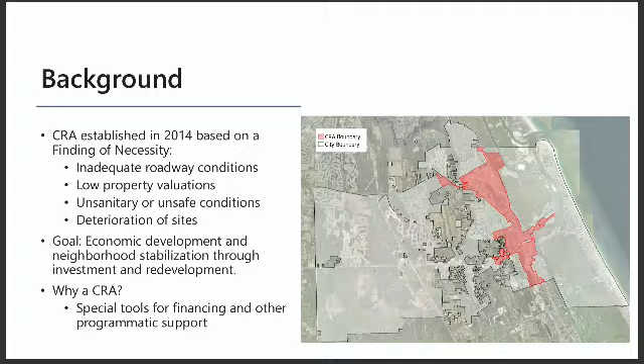This is not the first time that New Smyrna Beach has had a CRA. There was actually a prior CRA prior to 2014, but a new CRA boundary was established in 2014. So we are about 10 years out from that, looking to update that plan.

So why update? One thing, we want to review progress and successes that have happened over that 10-year period. Conditions change, so we want to make sure that we're dealing with the conditions that are still relevant in 2025, not just conditions that were relevant in 2014. There were also some very specific conditions within this CRA that had to do with which areas the CRA could invest in that changed after that 10-year mark was passed, so we're able to address those more fully now.

And then finally, there's the opportunity to hear from new people. So there are people who either weren't aware and didn't participate in the earlier plan, or maybe didn't live here and have become part of that new investment in the CRA area.

So let's move into some of the strategies that are already in the CRA plan. And when we talk about an update, it really is an update. It's not a whole new plan. We're validating that some of those strategies are still necessary, and then identifying gaps for where there's a need to revise or enhance those strategies.

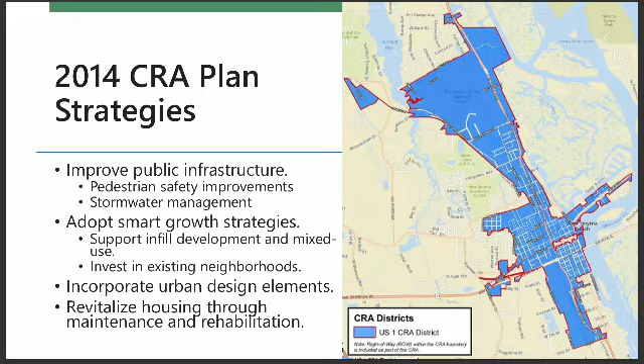So some of the key strategies in the existing plan are infrastructure, specifically for pedestrians and stormwater. There is generally smart growth strategies. Smart growth is very aligned with CRAs because fundamentally it's about reinvesting in existing places, whether it's existing neighborhoods or infill and redevelopment of properties that need a little care and attention. Urban design elements can help to make the CRA area more desirable and bring in new investment. And then one of the key elements of the 2014 plan was reinvesting in housing, so making sure that those housing structures that are there get attention so they're maintained and rehabilitated when necessary.

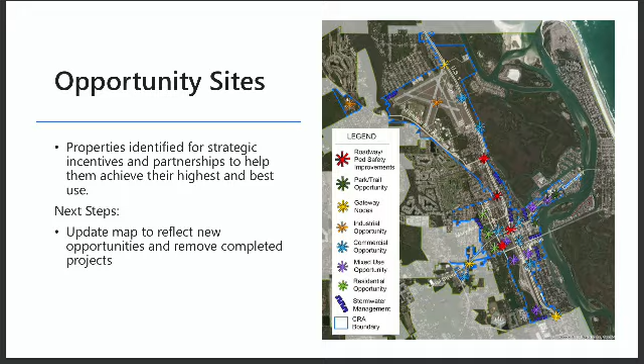The 2014 plan identified specific opportunity sites. We're looking at those to see if they need to be updated as part of this relook.

And then we love to celebrate success. Since the CRA was established, we've more than doubled the valuation of all the properties within the CRA, so that's a good direction to be going. It also increases the amount of funding available for the CRA to reinvest in the area. Some of the projects that have been done, and the way CRAs work with a TIF is that they build up money over time, so the longer they go, the more money they tend to have to reinvest in the community. Recent projects include the septic to sewer conversion on Mary Avenue, the Bowman Center, which is a private reinvestment supported by the CRA to provide new uses in an old building, and the affordable housing project for seniors called Green Lawn Manor. That project was a collaboration that the CRA was part of.

So now we're going to move into existing conditions. Emily?

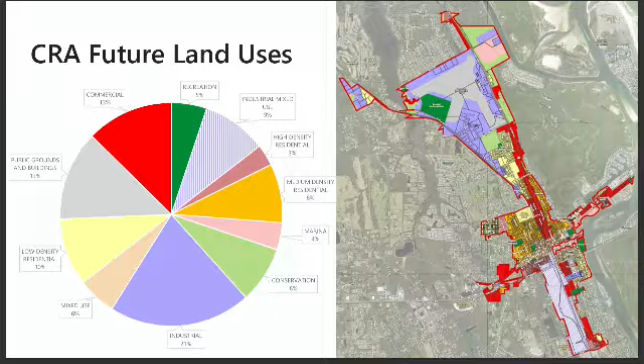First, we're going to look at the future land uses within the CRA boundary. A future land use designation determines the type of development you can expect to see on a piece of property, whether that's residential, commercial, or mixed use. Within the CRA boundary, we see a good mix of future land uses, with industrial being the most prevalent.

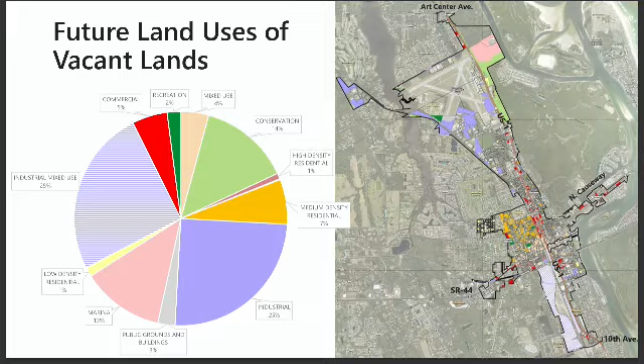Along US 1, we see some commercial, and we'll take a closer look at all of this as we get further into the presentation. Just some highlights: the commercial along US 1, some medium density residential in the historic west side, and a large industrial mixed use property to the south.

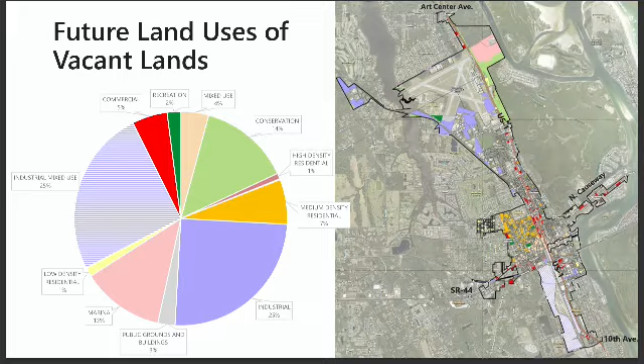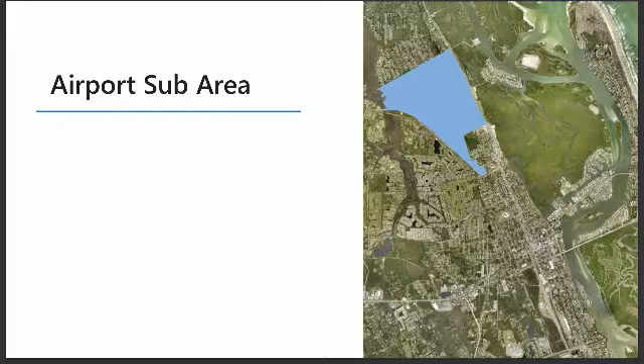Some of the challenges we looked at—we tried to look at similar challenges across each sub-area. Starting with transportation, the main issue that's come up is the entrance to the airport, particularly for people making left turns. There's no signal, so that can be a difficult turn to make either in or out. That's something being looked at already in terms of whether it makes sense to have a signal, or even potentially consider moving the entrance. But that's something we can also include in the discussion of the CRA plan.

One of the general goals within CRAs is beautification, so landscaping is part of that. We do want to recognize there are limitations around the airport because of the presence of birds that can be attracted by certain types of landscaping. There's a whole book full of rules around what kind of landscaping you can do, particularly in those runway areas, but there are opportunities between those and around the airport entrance for doing some beautification.

So for each of the sub-areas, we're going to zoom into this map we showed earlier about redevelopment. I won't re-explain the redevelopment framework, but dark is more likely to redevelop, light is less likely to redevelop. The airport is a very specific condition where the goal is to have uses that will really benefit from being close to that airport, so those are very specific uses, and the airport is working on attracting some of those users.

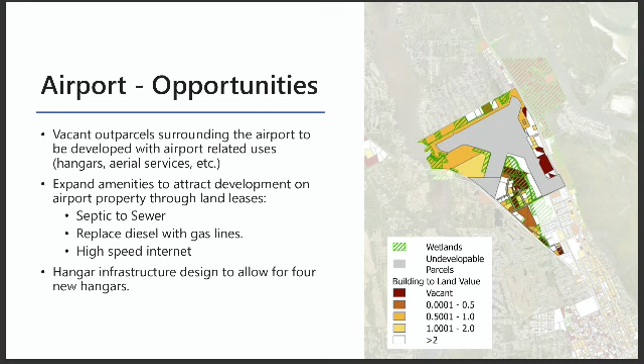The airport master plan already cites some needed investments, including septic to sewer conversion, replacing some of the diesel with gas lines, as well as bringing in high-speed internet. There's already some plans for bringing in additional airport hangars. So moving on to sub-area 2, the US 1 corridor.

Because US 1 goes basically the entire length of the CRA area, we broke it into three different segments. So we're starting off in the northern area, kind of close to the airport, north of Industrial Park Avenue.

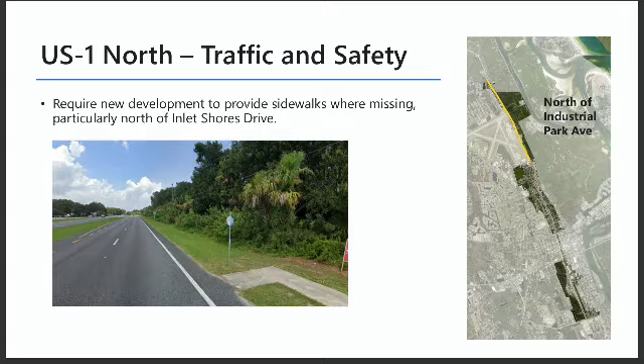Here, the biggest concern is the lack of sidewalks. Once you get to Inlet Shores Drive, the sidewalk ends, which raises concerns for walkability. But there is potential to address this issue upon development of some of these properties along US 1.

Looking at Lytle Avenue to Industrial Park Avenue, we observed some narrow sidewalks which are close to the street, which creates safety concerns for pedestrians, and it doesn't feel safe for people walking. They're more likely to try to drive or find another option.

There's a lack of landscaping, which again can create more of a barrier between the pedestrian and traffic, as well as provide some beautification.

We noticed that some of the side streets off of US 1, which our boundary does include some of the neighborhoods behind US 1, and some of those streets are either lacking curbs or they're substandard. So there's an opportunity to restore those curbs upon redevelopment, which can help with stormwater management. Additionally, some of the bus stops are not up to current standards as they're missing the paved landing area.

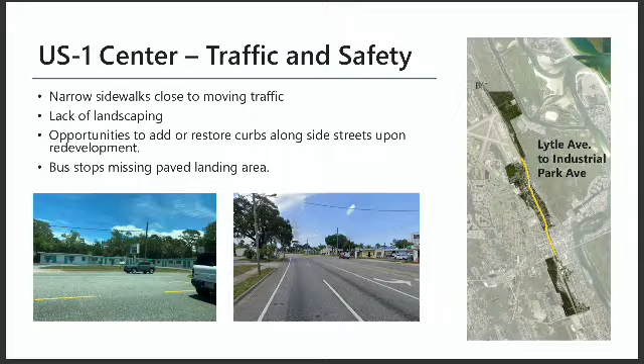Now we'll look at that third segment, which is 10th Street to Lytle Avenue. We noticed here there's a lack of high emphasis crosswalks, so it's hard to see them a lot of the time, and that creates another hazard for pedestrians as the drivers are less likely to notice them.

There's an opportunity for cross-access connections, which can allow people who are visiting these stores along the road to access the sites through drive aisles connecting them, versus having to turn out onto that major roadway to access a site that's basically right next to them. It reduces conflict points and reduces the chance of an accident turning into high-speed traffic, and also moves cars off of that main road.

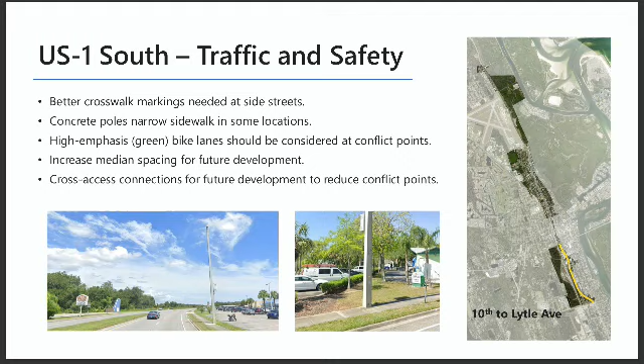There's a variety of both vacant lands along the corridor and some high redevelopment potential. With a commercial future land use, this provides an opportunity for more retail development, as well as some mixed use, which could bring some residential in as well.

And you can see specifically to the north, there's a big piece of land that is vacant, as well as some of those brown parcels, which are the most likely to be redeveloped.

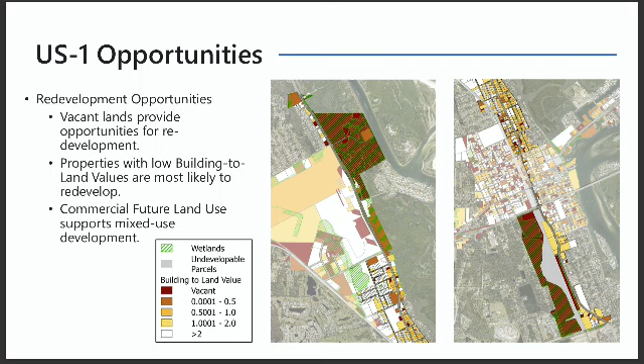In some of the neighborhoods behind US 1, we see that yellow, which means medium development potential in those neighborhoods. So we'll see some more low to medium density residential in those areas. And then looking more south, we continue to see that medium redevelopment potential.

Now, getting into the North Causeway sub-area. Of course, this is a narrow strip, but there is development on both sides of the road on the causeway. We know that there's been some real safety concerns here, including a pretty serious crash. So we're taking an especially close look at the biking and walking conditions here.

One of the things we noted is there's a great shared use path. It's great to have that, but there's a lack of some of the safety signage and directional signage that would assist people with navigating that.

Similar to some of the places that Emily mentioned, there's a lack of clearly marked crosswalks. You want to see that bright white ladder - that's really the best case scenario for a crosswalk, and a lot of these don't have that, either on the side of the street by the shared use path or crossing the major roadway.

Speaking of crossing the major roadway, there's only one place that you can cross that major roadway at a crosswalk, and that's at the signal. So that's a pretty long distance for a pedestrian to have without being able to cross that major roadway. So thinking about maybe some more safe crossings would be a consideration here.

The other thing that you see is that there's a narrow shoulder, and sometimes that can get confused with a bike lane in these conditions. So that's another thing that we look at.

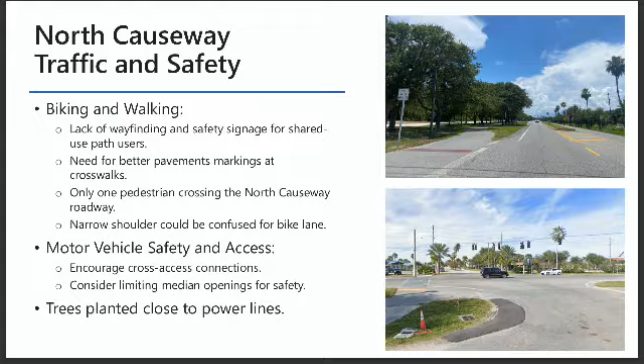There's also some trees planted pretty close to the power lines. We love trees, but they need to be in the right place, and that may or may not be the right place.

Now, in terms of redevelopment potential, you can see some of the white that's not going to redevelop, and then some of these orange areas, that deep orange, is the boat ramp area. So if you've been out there, there's a lot of undeveloped pavement around that boat ramp that is the potential to be something way more exciting.

As well as some other properties that are showing up. And of course, the fact that they light up on the map doesn't mean they're going to change tomorrow. It may be the property owner doesn't want to change. It may be that it's residential and people aren't interested in moving. It just means that the financials are there that might support a change. So every property is unique.

The land uses out here tend to be either commercial or mixed use, so the kind of development you would expect would be either residential or retail.

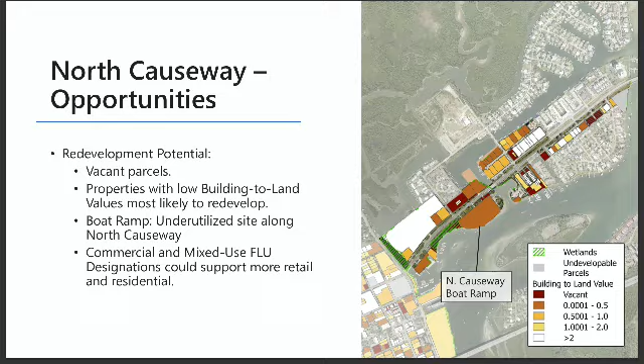Now let's move into the west side sub-area, again including the historic west side, but not solely that. It includes State Road 44 going out of town.

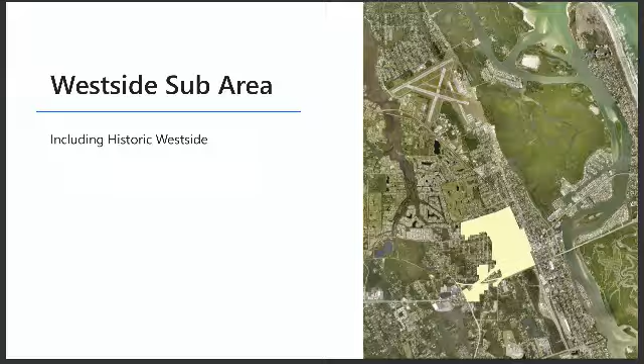This is really one area where stormwater has been something we've heard about, and we took a look at that, and it's evident that there's not a lot of stormwater infrastructure out there. So a lot of either swales, open drainage, or not even that in some cases. There are a limited number of these catch basins that would be able to divert the water to where you want it to be, away from people's properties. So during these severe storm events, you can see the lack of infrastructure there to really deal with those events.

When it comes to the sidewalks, as you can see on this example, there's no sidewalk, and that's pretty typical, and there are other streets where there are sidewalks that stop and start.

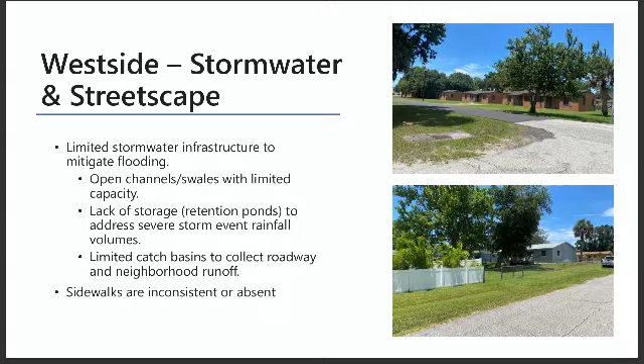Looking at the redevelopment potential, the dark red here are actually vacant lots, so no structure on them at all. That's obviously the lowest hanging fruit for redevelopment. Love to see people coming in and building something on those missing teeth. And then there's also some other properties, actually fewer, that are in between.

We do know about some specific opportunities like this Kmart site where it's a building that's a little bit tough, and it's been tough to get somebody to have a new user in there. So that's something that we'll be looking at.

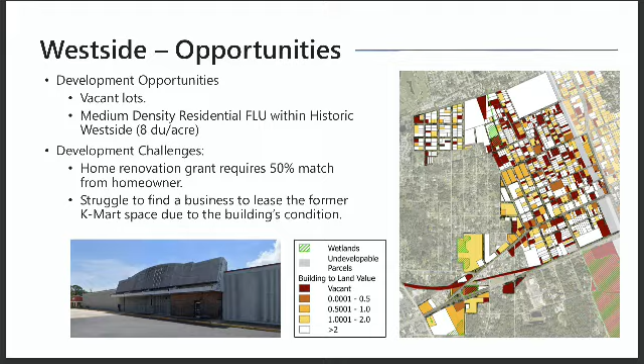The other thing we're aware of is that this is an area where you do have some housing stock that isn't in the best shape. And so what's great is there's a program, a home renovation grant program. What's not so great is that the reason those properties tend to be in disrepair is because the people don't necessarily have the money to do those repairs. So when they have to have a 50% match, they may or may not be able to come up with that match.

So moving into the downtown sub-area, what we're calling the downtown sub-area includes probably what you'd think of as the downtown. I don't think we talked about this earlier, but you see how Canal Street is grayed out. Canal Street was part of the previous CRA, and essentially lots of great things happened. Flagler Avenue, I believe, was also part of the previous CRA. So those places have already been invested in, they've already improved, and so they're no longer part of this new CRA. That's why that is cut out there.

But behind Canal Street, there's still plenty of opportunity. You see not so many vacant parcels, but some of those darker orange parcels that are now, especially now that the land values have gone up, there might be more opportunity to put a new structure on those lots.

So the north side here really is that area around Canal Street and off the North Causeway. And then south of the South Causeway is the hospital area. So I just want to call that to your attention. What might be possible around the hospital might look a little bit different than what makes sense right around Canal Street. What's true of both of these areas is they have future land use designations that support mixed-use development, that support both retail and residential.

They also are addressed by this bed and breakfast overlay district, which allows for flexibility around providing those bed and breakfast uses. Some of what's been identified as a need - another thing worth mentioning in this area is this is one of the higher density areas around town in terms of what could happen, what's allowed.

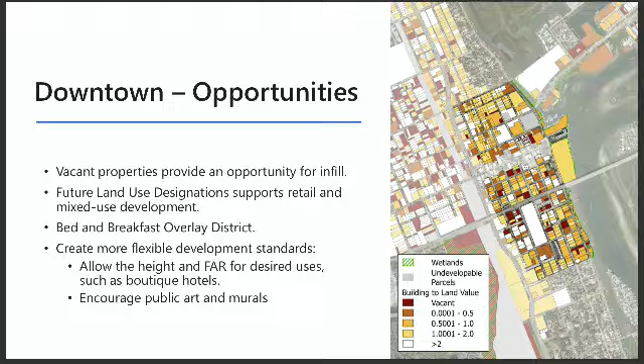So I'll let Emily talk about general opportunities. While we've been taking a deep dive into each of these sub-areas because they're all unique, there's also some general opportunities that we can apply to the entire CRA boundary to help implement some of these goals and achieve the vision of the CRA plan.

There's kind of two different directions. One is trying to have some more flexible development standards to attract that development and maximize the use of each property through shared parking, shared stormwater, and shared green space amongst neighboring developments.

As well as holding those developments to a higher standard so that we are following the goals of this plan to create the quality of life we want to see, through standards such as wider sidewalks with street trees and benches to support walkability, landscape buffers to also support walkability and beautify the area, and some architectural design requirements so that these new developments look beautiful and people who live here will want to spend time here, which in turn will benefit all of these businesses and support the economic growth we're looking for with the CRA plan.